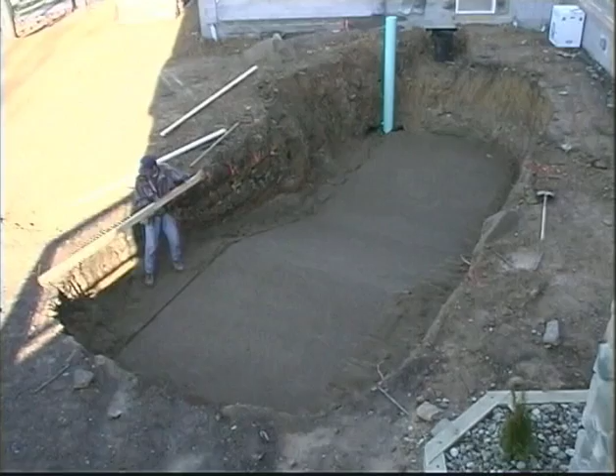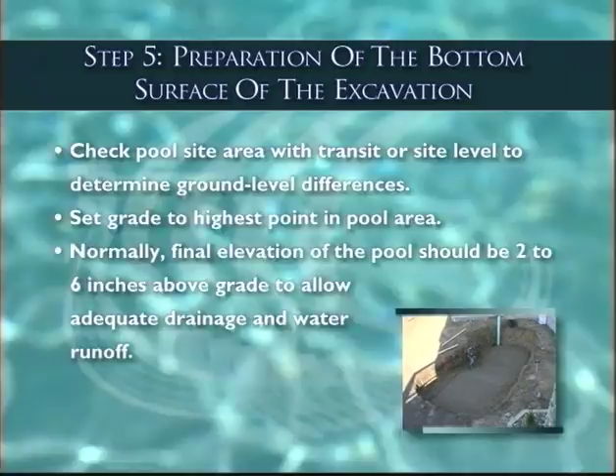...the voids with sand, being careful not to disturb the sand. The pool site area is checked using a transit level or site level to determine the ground level differences. Grade is normally set at the highest point in the pool area. Normally, the final elevation of the pool should be 2 to 6 inches above grade to allow adequate drainage and water runoff.

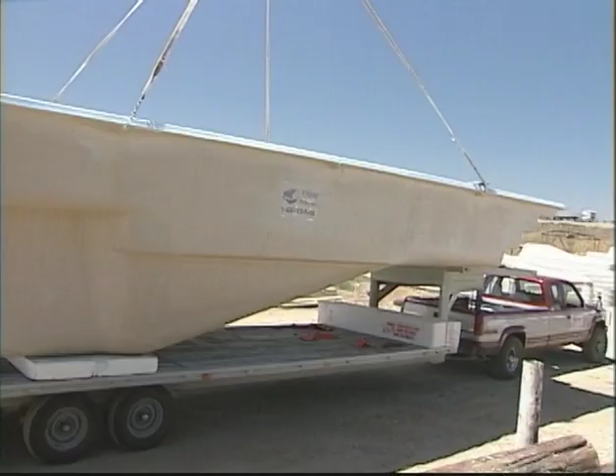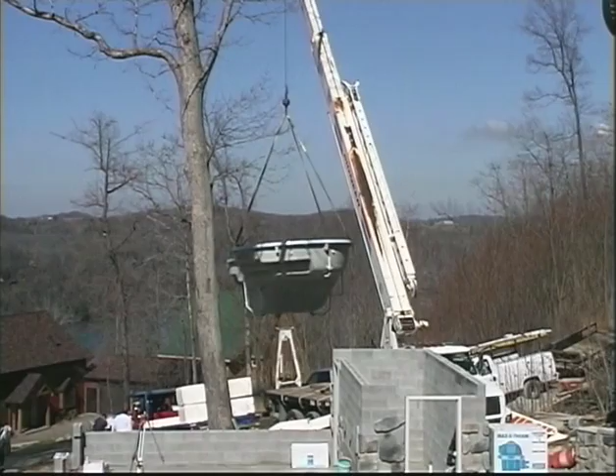Step 6. Setting the pool. Your pool will arrive on a truck-trailer combination. Be sure to inspect the pool for damage that may have occurred during transportation and for conformity to order specifications. A crane or excavator will lower the pool into the excavation. Please note that Viking recommends lifting all pool models over 12 feet wide with a spreader bar and 20-foot lifting straps.

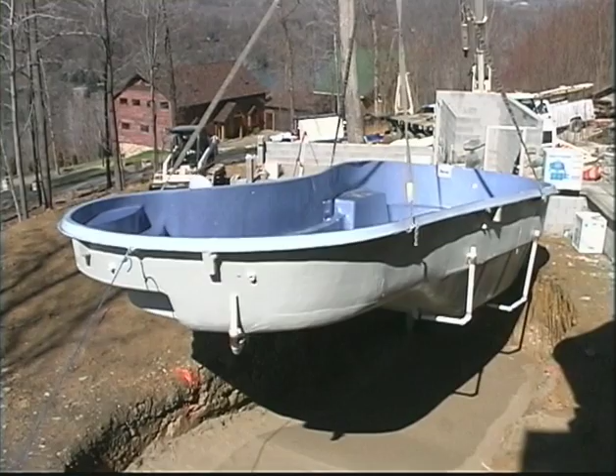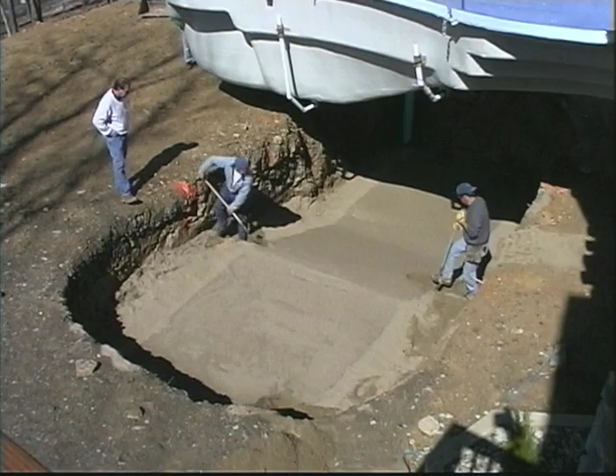Once the pool is set in the excavation, the pool should be checked for level and the bottom should be walked over to detect any voids in the sand that might be present. The pool is then lifted and reset as many times as necessary to achieve a good fit. A good fit is realized by raking the surface of the sand in order to see where the pool's perimeter is touching after it's removed, and also by walking around on the inside of the pool to detect low spots.

It is normal to feel a slight void under the center of the pool. This will disappear under the weight of the water. It's important to make certain that the bottom perimeter and all transition points are sitting firmly against the sand bed. The pool can be separated from the lifting equipment when the entire perimeter of the pool, including all transitions, leaves a clear footprint and the pool is within 1/2 inch of level.

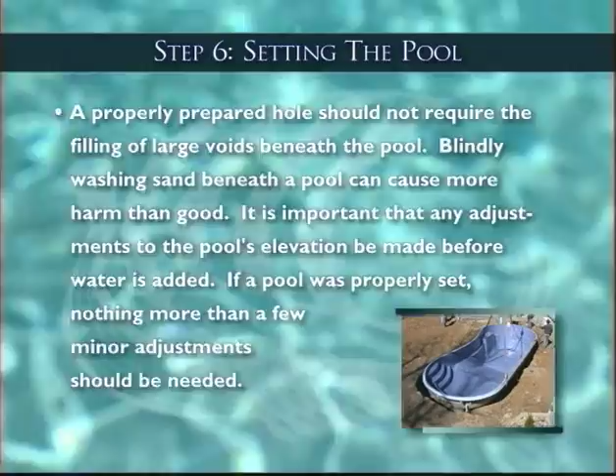A properly prepared hole should not require the filling of large voids beneath the pool. Blindly washing sand beneath a pool can cause more harm than good. It is important that any adjustments to the pool's elevation be made before the water is added. If a pool was properly set, nothing more than a few minor adjustments should be needed.

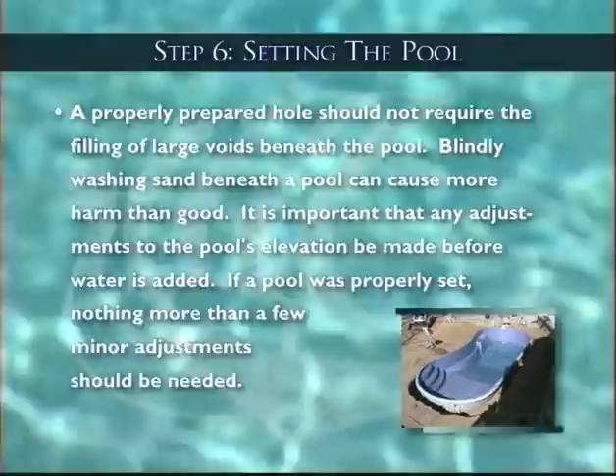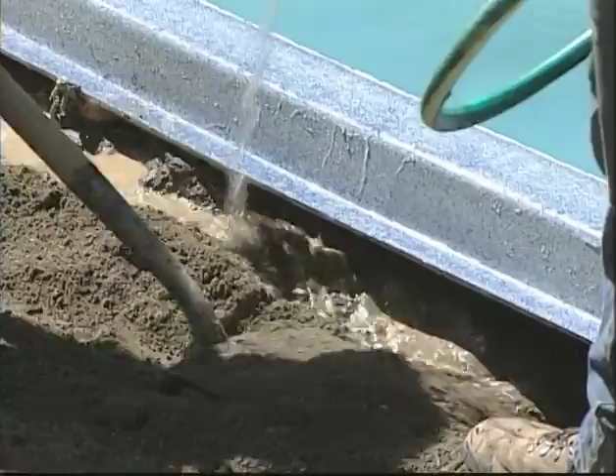Step 7. Water and backfill. Locking in is the process of placing and tamping the first 6 inches of backfill around the radius of the pool to hold it firmly in place during the installation process. After your pool is locked in, start the water in the pool and continue the backfill process. The level of water in the pool and the level of sand outside the pool should be within 6 inches of each other. Continue the filling and backfilling process.

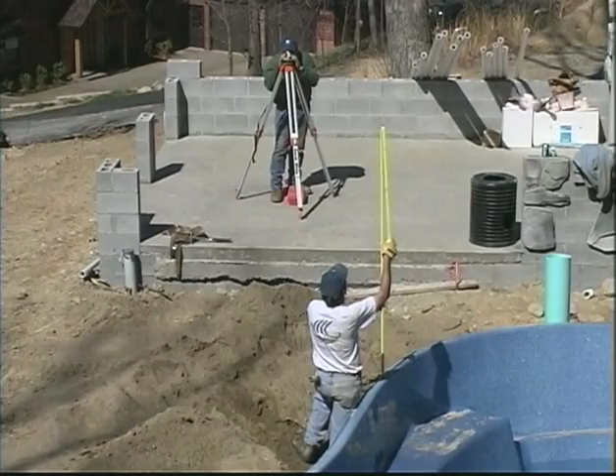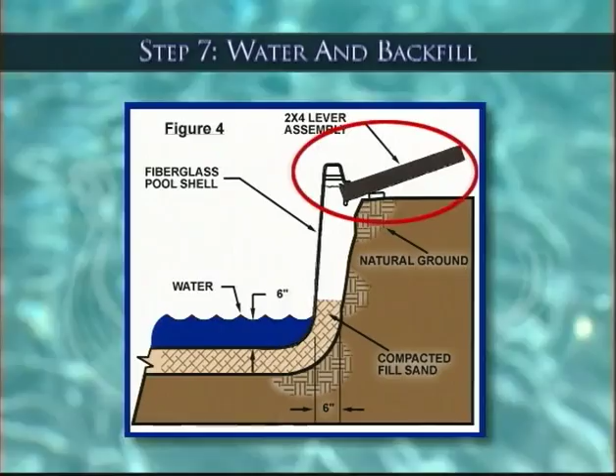Check the level of the pool. If the pool was properly locked in, no adjustments should be necessary. If any movement has occurred, small adjustments must be made at this time by placing a lever assembly under the coping of the pool as indicated in Figure 4 of the installation guide. If adjustments are needed, raise the pool to the proper height and place sand under the pool. When the proper height is achieved, continue the filling and backfilling process.

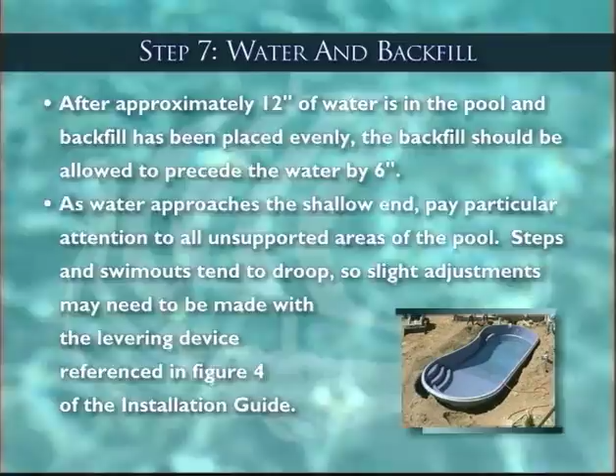After approximately 12 inches of water are in the pool and backfill has been placed evenly, the backfill should be allowed to precede the water by 6 inches. As the water approaches the shallow end, pay particular attention to all the unsupported areas of the pool. Steps and swim outs tend to droop, so slight adjustments may need to be made with the levering device as mentioned previously in Figure 4.

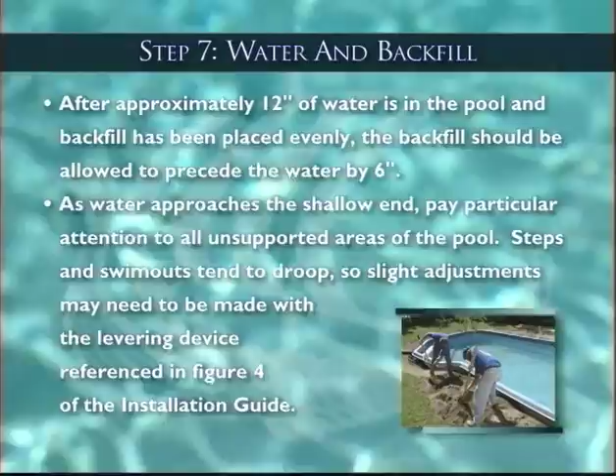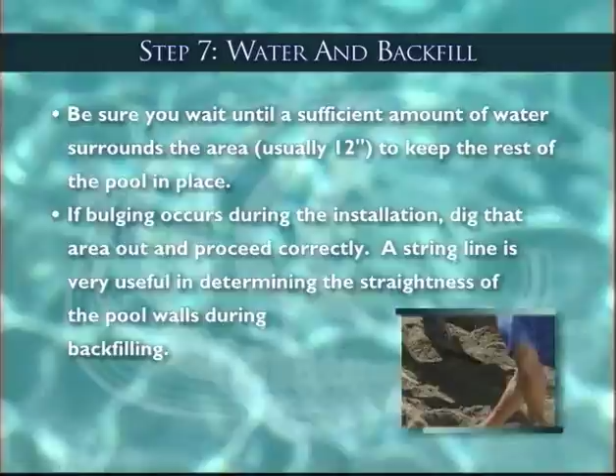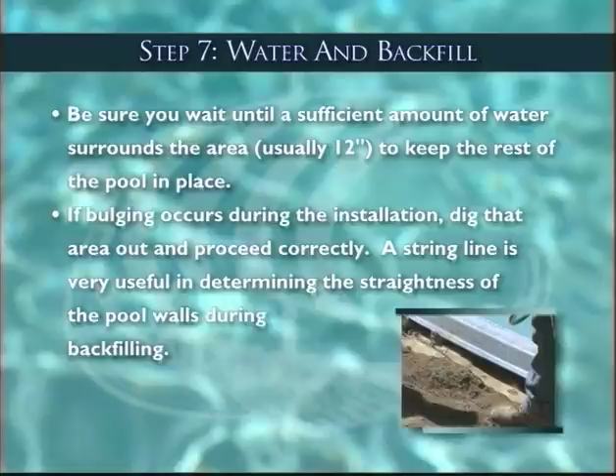Be sure you wait until a sufficient amount of water surrounds the area, usually 12 inches, to keep the rest of the pool in place, or you may raise more than you intend. If bulging does occur during the installation, the only remedy is to dig that area out and proceed correctly. A string line is very useful in determining the straightness of the pool walls during the backfilling process.

Step 8. Plumbing. When the water and backfill levels are close to reaching any of the pool inlets, stop the filling and backfilling process and run the plumbing pipes along the excavation cavity and route them to the equipment site. After the plumbing is installed, complete the filling and backfilling process.

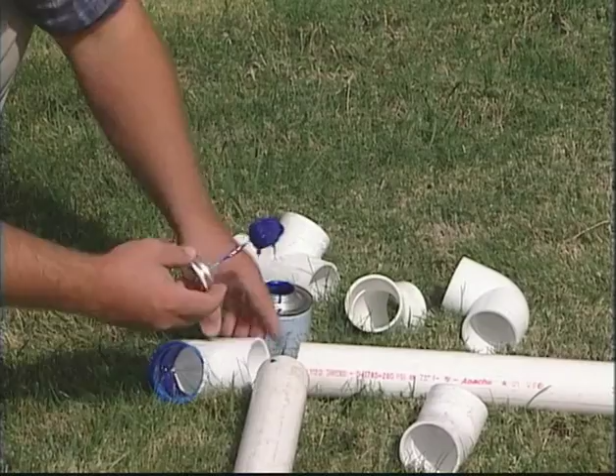A basic swimming pool circulation system is relatively simple in operation. Refer to Figure 5 of the installation guide for a basic filtering system diagram. See your contractor for more advanced filtering systems that may include sanitizers, jets, blowers, automatic pool cleaners, etc. Viking recommends the use of Schedule 40 2-inch plumbing on most pools.

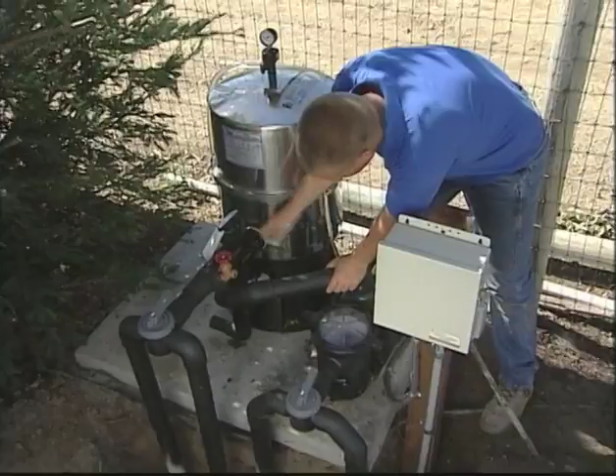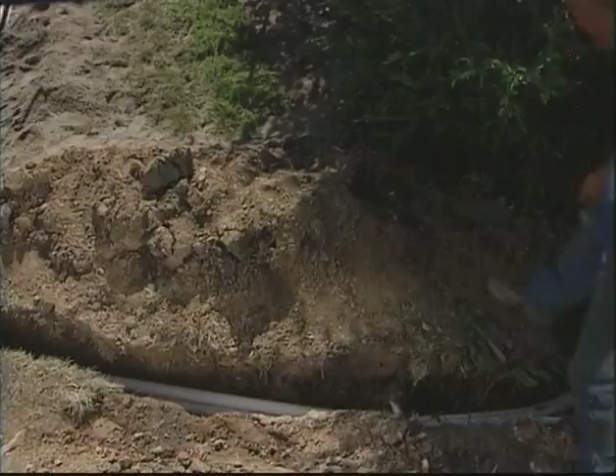Visually inspect all plumbing installed at the factory upon the delivery of the pool and during the backfill process. To prevent accidentally draining the pool, Viking suggests placing the equipment at or slightly above the elevation of the pool and plumbing the pool so that the water leaves the pool via the skimmer and not the main drain. You should not place the equipment higher than 6 inches above pool level.

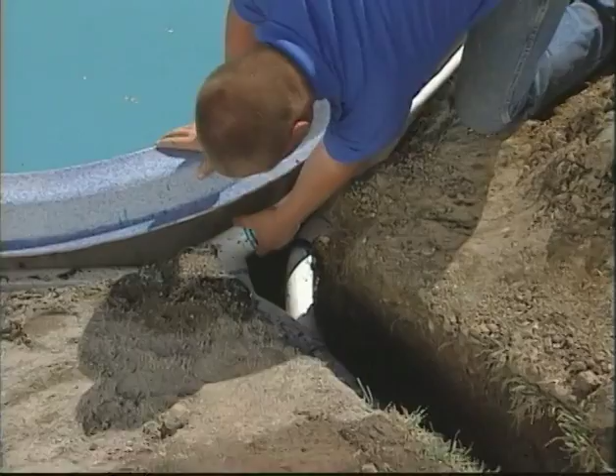If the equipment is placed below the water level, shut-off valves must be installed to prevent accidental siphoning of the pool. Check all connections for leaks and proper circulation before covering them. Local building codes may require pressure testing of the plumbing system before the installation is complete.

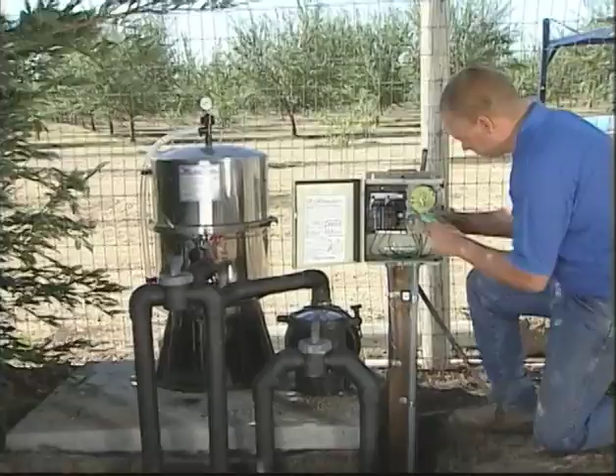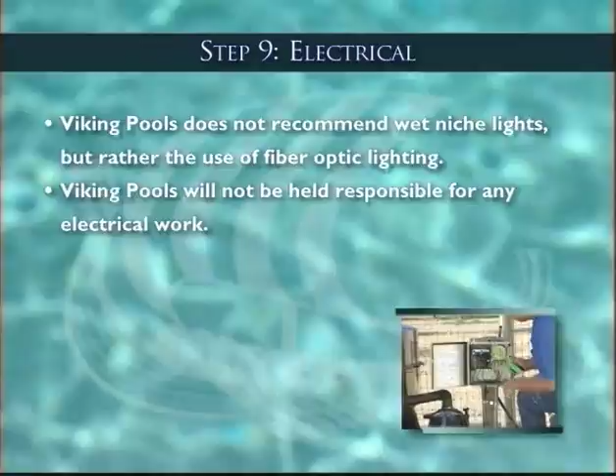Step 9. Electrical. If the installer or homeowner is not qualified to do electrical work, an electrician should be hired and a building official should inspect the work. All electrical work should be done to National Electric Code specifications and any local codes. Viking Pools does not recommend wet niche lights, but rather the use of fiber optic lighting. Viking Pools will not be held responsible for any electrical work.

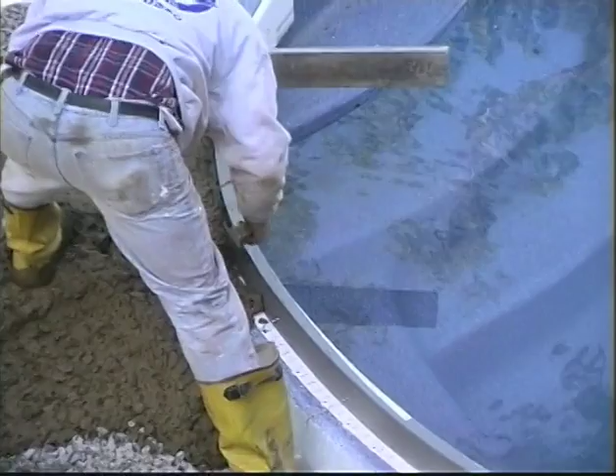Step 10. Pouring concrete. Forms are now put up around the perimeter of the pool. Half-inch holes may be drilled into the lip of the pool every 3 feet. 2-foot lengths of 3/8-inch rebar are placed in each hole and bent at 90-degree angles, as illustrated in Figure 7 of the installation guide. This will ensure a bonding or anchoring effect on the sides of the pool.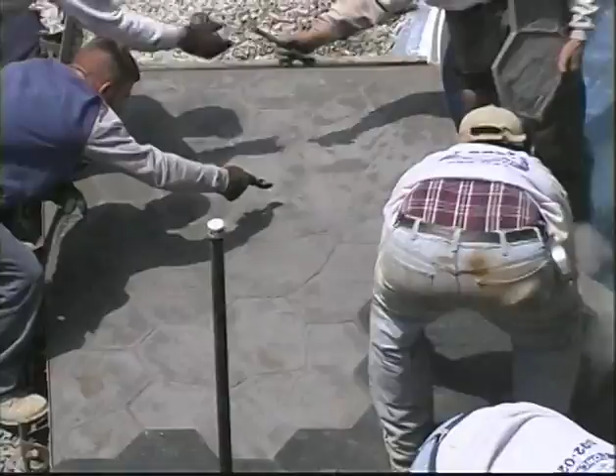After the concrete forms have been set, the building inspector does a pre-deck inspection before pouring the concrete. After the concrete deck has been poured around the perimeter of the pool, a final inspection will be made. The concrete can be installed as a simple deck or as creative as your imagination.